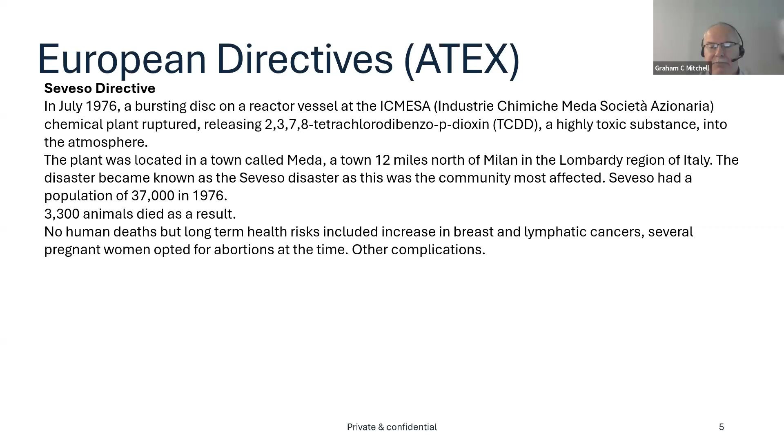So that Seveso directive actually became, in the UK, what we know as the COMAH directive. I'm sure some of you are familiar with COMAH. That came as a result of the Seveso European directive, which in turn then led to the ATEX directives as well.

As I'm sure you all know, these European directives have to be transferred into UK law. The way this came about was the Dangerous Substances and Explosive Atmospheres Regulations of 2002. These were passed under UK legislation to ensure that the essential health and safety requirements of the ATEX directives are met.

The HSE ACOP L138 states that the Dangerous Substances and Explosive Atmospheres Regulations of 2002, as set by the statutory instrument 2002/2776, set the minimum requirements for the protection of workers from fire and explosion risks related to dangerous substances and potentially explosive atmospheres. The regulations apply to employers and the self-employed at most workplaces in Great Britain where a dangerous substance is present or could be present.

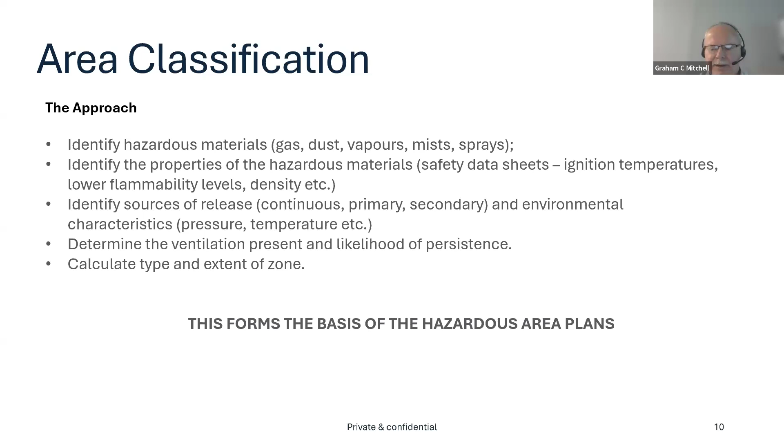So if we look at area classification, identifying the type and extent of the zone, typically a statement would say we've got a zone 1 internal with a zone 2 bubble of 2 meter radius around the point of discharge. So that could be a typical area classification of a fuel storage tank.

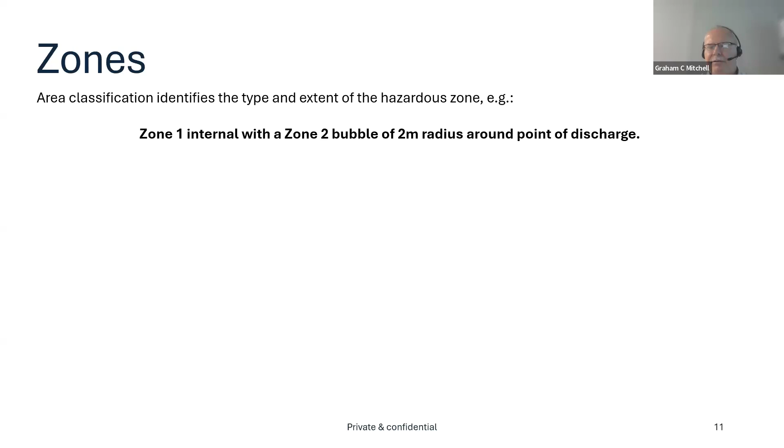In terms of how we look at those zones and judge it, if we start with the gas zones, a zone 2 would typically be a release that's present for 10 hours a year, and when present, typically less than or about 1 hour duration, not more than that. If the persistence becomes longer, between 10 and 1,000 hours a year, then you're looking at a zone 1. If it becomes greater than that, you're into continuous presence. An example of that would be the internal of a fuel storage tank, such as Buncefield.

Then if you look at the dust zones, you have a similar thing, but they just call them 22, 21, and 20.

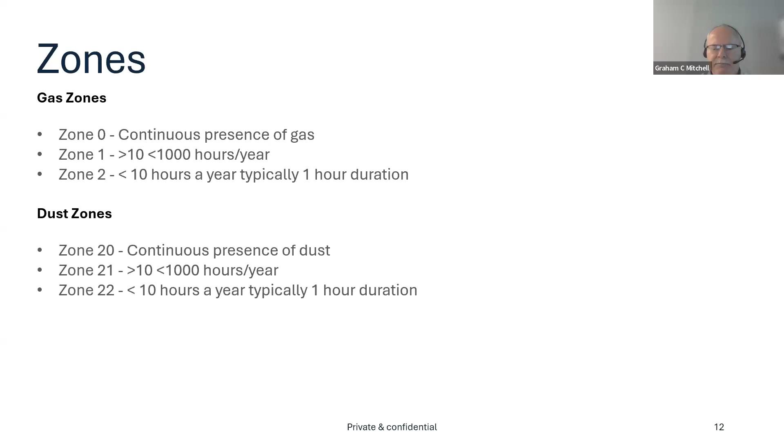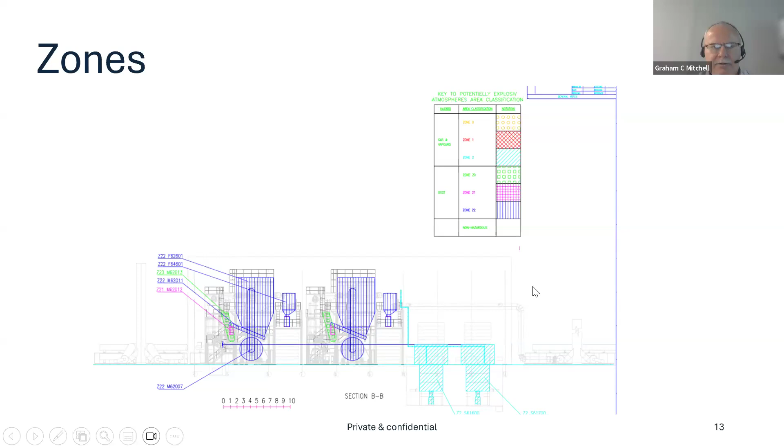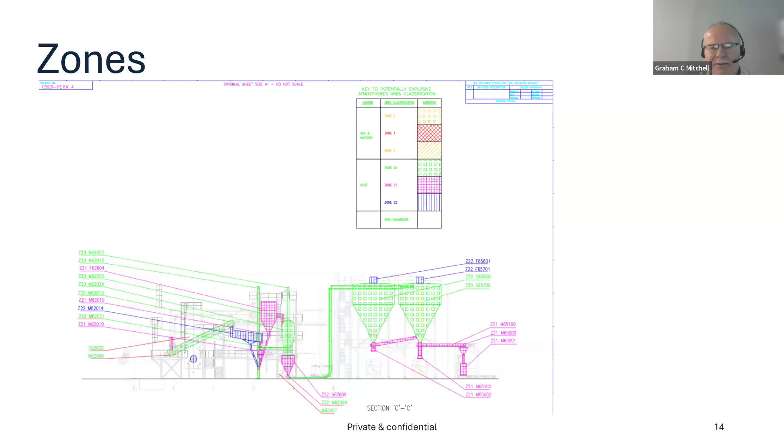There is another example, which in this case are all dust zones. You can see there's a lot of explosive atmospheres about in some of these works. Dust can be a lot more problematic than gas actually, because we often know very little about the materials we're handling in terms of dust, so it's not an easy exercise for us to clearly conduct a risk assessment.

So now we'll look at product. You can see we've done the zoning now and identified where all these explosive atmospheres are. What we now need to do is say, okay, what do we do next? We identify what zone is applicable from the drawings and the tables, because we do have tables that we use in the risk assessment to determine the drawings. From that information, we'll be able to identify the temperature class, or T class, required for the installation of equipment, and also the gas subgroup or dust subgroup.

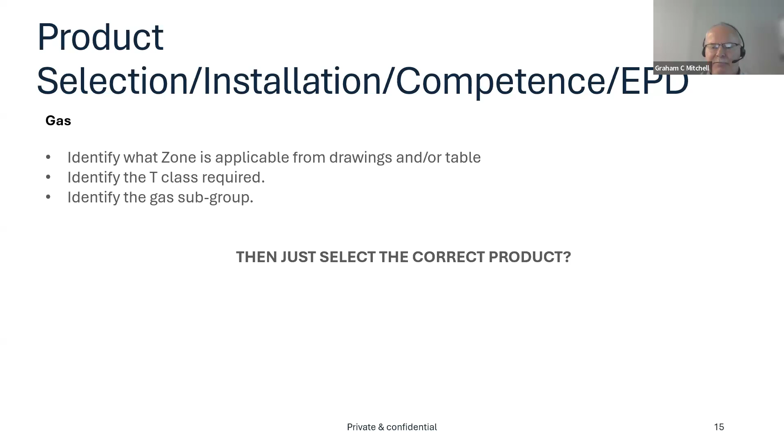So then it may look as simple as just select the correct product. You would like to think so. You have all these explosive atmospheres, and somebody has to say, well, is this suitable for this atmosphere? There are differences - in terms of the gas zones and dust zones, there are 3 different types. And in order to pick the correct type, you have what we call equipment categories or protection levels.

Basically, I can honestly say they're kind of interchangeable - one comes out of the IECEx compliance route for equipment, and the other is the ATEX requirement. So ATEX talks about categories and IECEx talks about equipment protection levels, but effectively, as you can see, they're almost interchangeable. So if you were picking a piece of equipment for zone 0, you've either got a 1G or a GA piece of equipment. Often it'll be dual certified - it'll come as a 1G and a GA, and you'll see the markings in a moment.

And then if you wind down through the zones, zone 1 - obviously if a piece of equipment is good enough to go into a continuous zone, then it's good enough for zone 1, because this is the highest level of protection, the 1G and the GA, or the 1D and the DA. So you have your selections there. Just so you know, often a piece of equipment will be suitable for the gas and the dust zones, in which case it would be marked 1GD or GADA, okay?

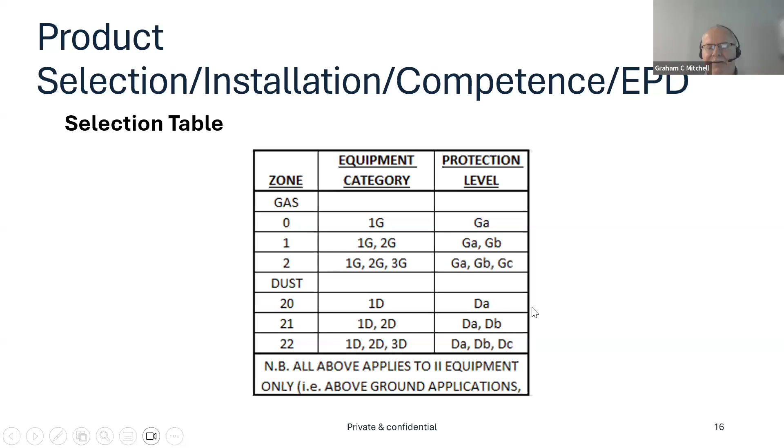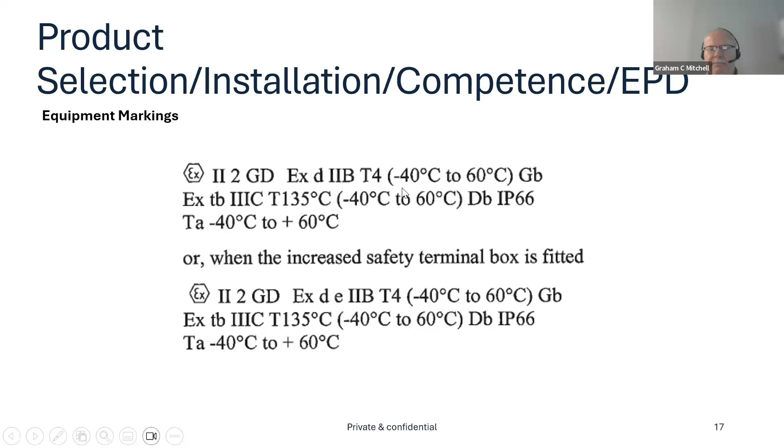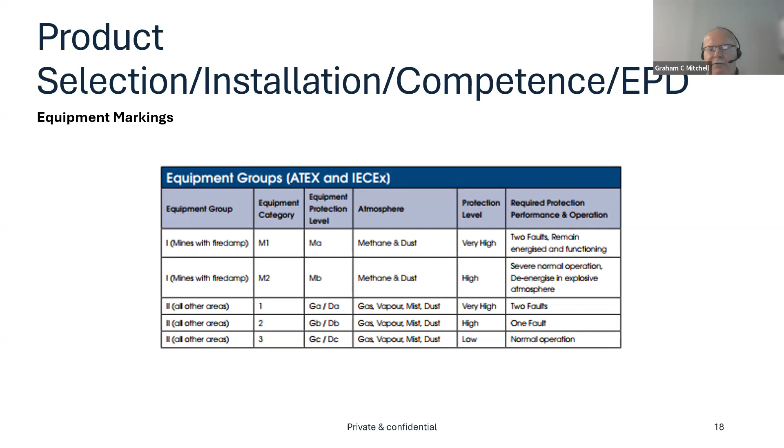Again, on product selection, what you see in front of you are the 2 different certification schemes. You've got IECEx and you've got ATEX. So you'll have a product that can be marked with maybe just this one on the top line, which means it's ATEX certified, or it may be that it's IECEx certified. And to throw a bit of a curveball in, we now have, thanks to the British government, the UKEX certification as well, which I don't show currently on this.

Basically this all resulted from Brexit, and now the UK government has stated that actually they will carry on with the ATEX certification. So there were a lot of people out there that don't exactly clap me when I turn up as an auditor, because they went and paid for UKEX certification when they actually didn't need to, because the government backpedaled and said, we'll carry on with ATEX. So this is the actual markings you would be seeing on certified equipment.

Now, the reason I say that is because there is a strange difference between the 2 schemes. We follow very much ATEX within Europe and the UK. Unfortunately, under that regulation and DSEAR, equipment manufacturers of electrical equipment are allowed to self-declare, so they don't need a certificate for category 3 equipment, the lowest level. So they can actually just self-declare, and nobody independently audits that or checks on the compliance. And for mechanical equipment, they can do that up to category 2.

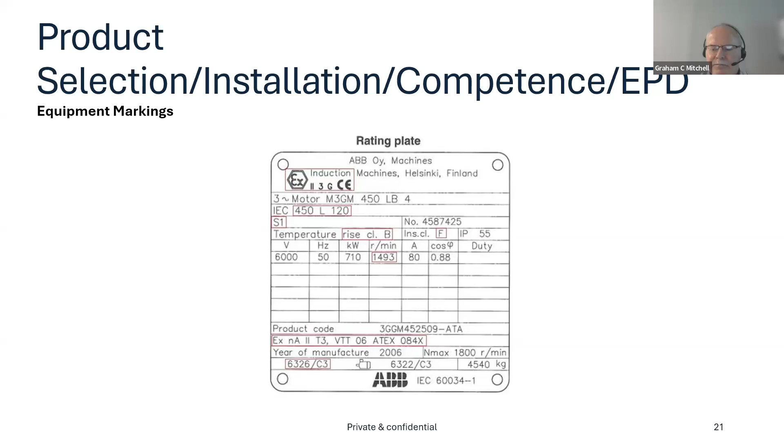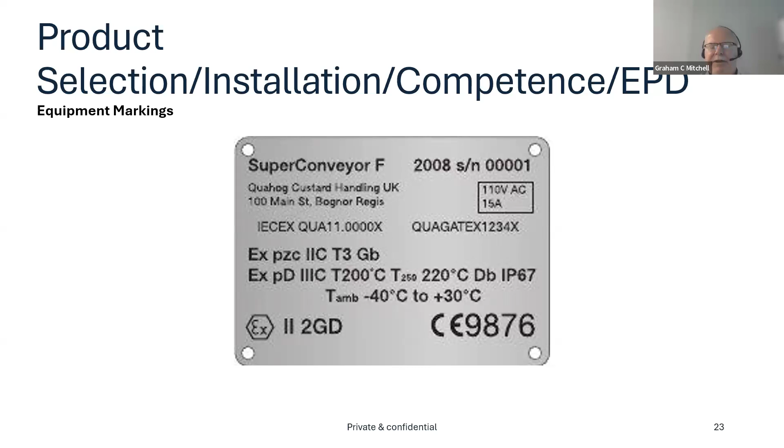As I said earlier, X indicates that special conditions apply, and it's vital that you actually get the certificate and read those, make sure you apply them.

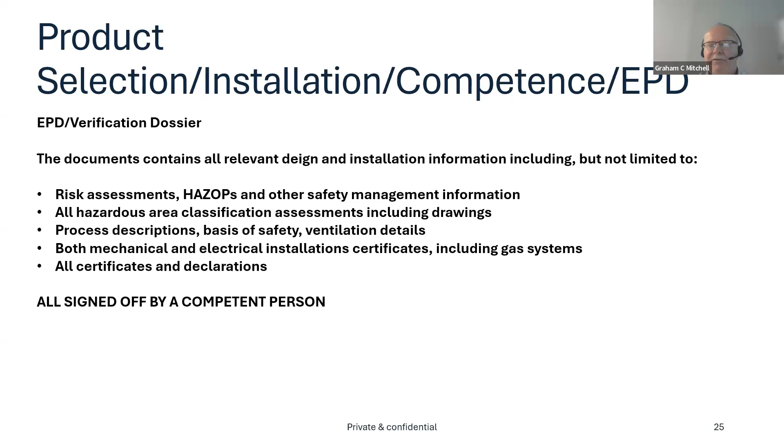So what is competence? I've done two presentations now in the space of a week, and I pretty much put the same slide up there. What is competence? How do we judge it? Believe me, it gets talked about an awful lot, but the judgment and the continued presence of competence actually, I think, is still a challenge to us all.

As I said, I'm a firm believer when it comes to the equipment that it all should be certified, because my own experience out there as an auditor and working elsewhere as well, not just auditing, is that we're losing a lot of competence in the industry. And as a result, people who are able to self-declare, can you imagine how dangerous that is? Because there's no judgment of their competence.

When I'm auditing and I go somewhere that is certificated, I actually have to make a judgment on their competence. And if I'm not happy about it, they run the risk of losing their certification. But if you can self-declare, none of that applies. So that was a whistle-stop tour into DSEAR and what it's all about and how we go about it. I hope it's been informative, and I open the floor to questions.